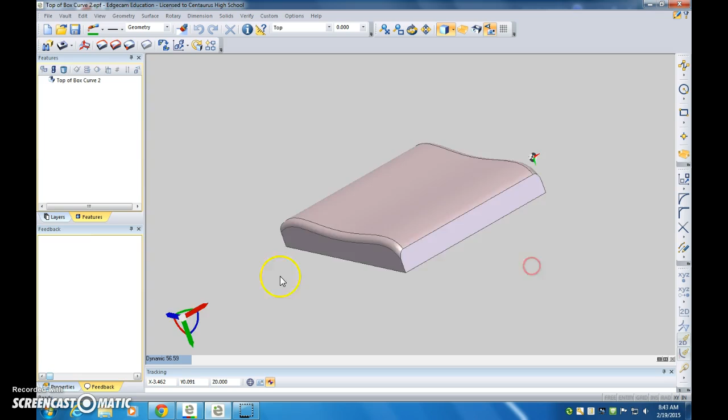Let's say this was your design. You got a neat little spline here, and then you decided, hey, I'm going to fillet these edges because it looks cool. That's not going to work because this bottom distance from this corner to the bottom of where that fillet is has to be a minimum of 0.45 inches, and I can guarantee right now it's not because I know the overall height of this is 0.75. So 0.45 should be more than halfway, and that is not more than halfway up that face.

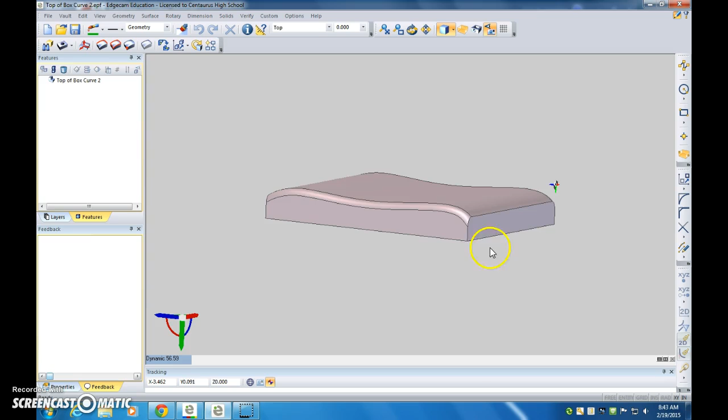So make sure you go back in Inventor and measure that. If that's shorter than that, it's not like, oh well, it's like you're going to mill into the clamp and sparks are going to fly, you'll break the bit. People will be screaming and crying.

So don't do that. This one is not going to work. We're going to have to use my other top of curve for this demo. So we're not going to save that one. And so here it is.

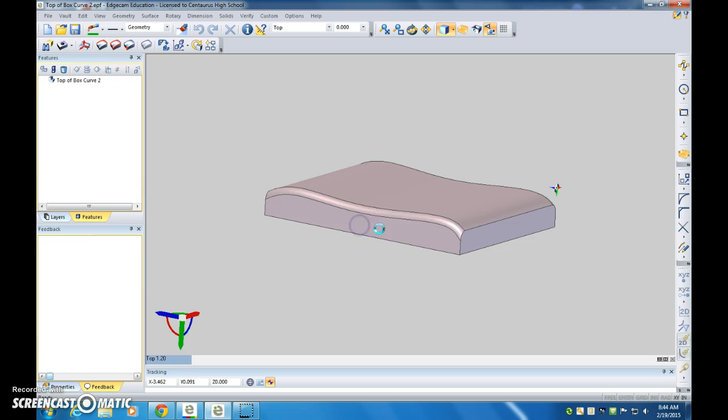So I'm going to orient this so that the long ways is this way because I need my CPL in this bottom left corner. Click my stock fixture button. Auto stock should be selected, it usually is, and then go to geometry, create CPL, origin through 3 points.

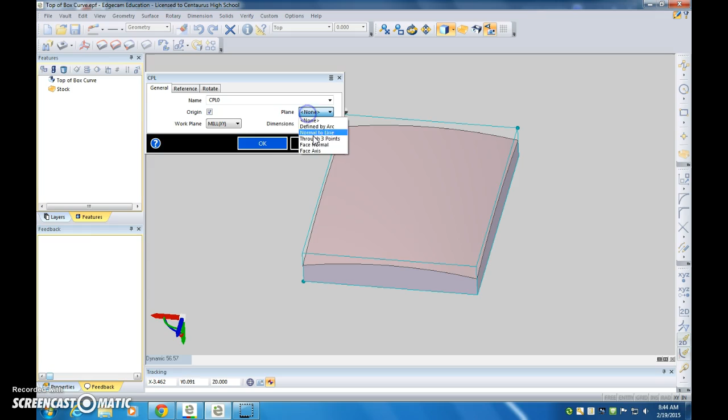Then we make sure that little blue box shows up for that corner, then the bottom right, then the top left. I'm using the scroll wheel to zoom in so I can find it because that CPL is in the way, and then I'm scrolling out and then I click that. Now my CPL looks great. I'm going along the y-axis, x-axis, and then z-axis straight up.

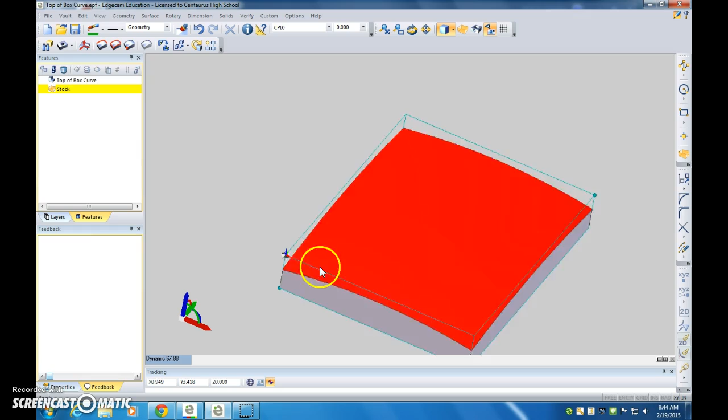So feature finder, I can click this. It's not going to find anything. It's just going to find the top surface, which is fine. That's what we want. Now we go to manufacture mode.

So you should just have one feature. You might have a couple depending on your design. And then click OK as long as it's set ProLight 1000.

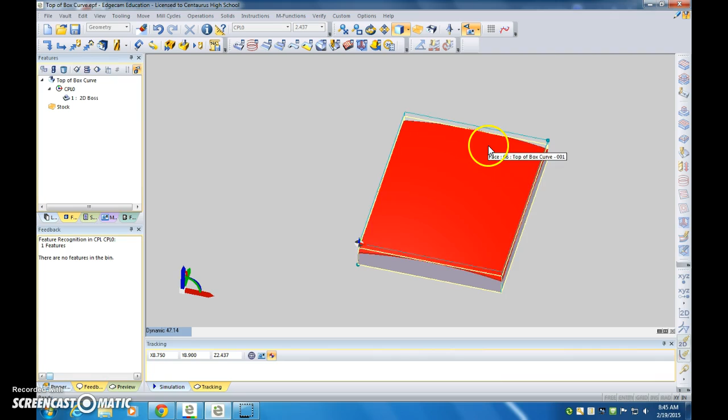Now this one is a really kind of cool here. We click parallel lace. And then I'm just going to click the top of the surface. Now if you got a really weird geometry, it might not be that simple, but just give it a try. Click it once, hit enter twice, and now we go into here.

So tooling, we want this to make sure that you say optimize. Really important it goes back and forth or you're going to be in the milling room forever. I'm going to set this to 50%. That means that it's going to go 50% of the bit over. I have a 1/4 inch bit, so it's going to go half the width of the bit over for the next pass. That might make sense here in a little bit.

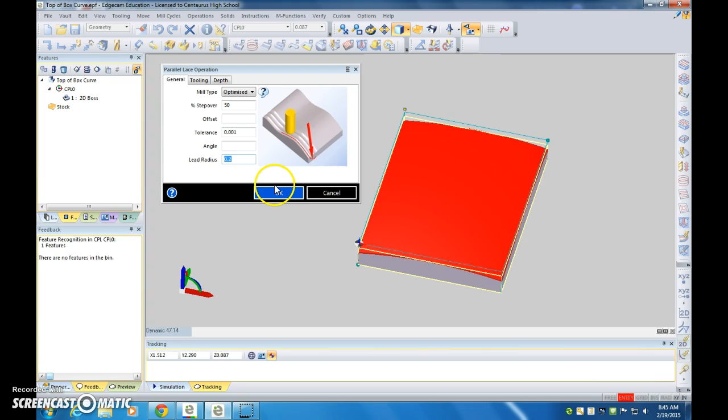I'm going to set my lead radius to 0. I don't believe that I need one. It's going to make it go a little faster.

So tooling, I want to be at 40, 20, 5,000 is our maximum. Diameter 0.25, and I'm going to do a corner radius. It's 0.125 because we're going to use a ball mill for this one. And depth is all preset on parallel lace.

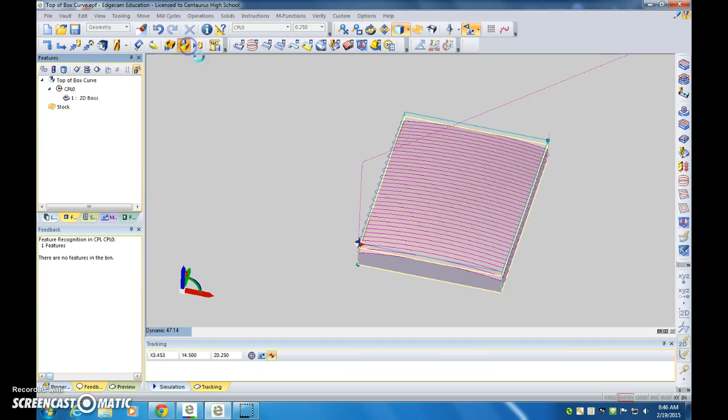So I click OK, and then it shows you the path. It just goes back and forth and up and down and makes that. So when we preview this, that's what it's going to do. And you can see these little grooves, this little like kind of wave pattern.

If I did a smaller percentage for step over, there would be less waves. So I'm going to actually show you that. We don't need to see that finished.

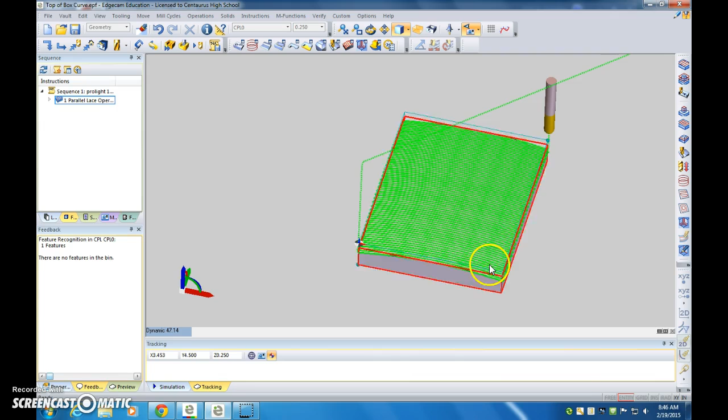I can go into sequence, this little S tab, and double click parallel lace, click OK. Now I can edit this. If I do a percent step over of 25% and click OK, you can see the lines are twice as close together. Then you simulate this, and you can see there's less of a wave pattern, so it's going to be cleaner, but you're going to be in there twice as long watching this thing mill.

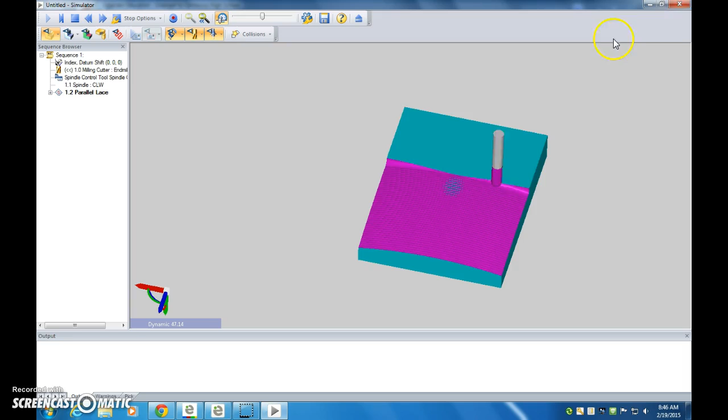So that's the drawback on getting a super clean print. There's another way that you can get a really cool clean print, so let me close that off. I can do a second parallel lace - I'll click this, click the top, hit enter twice, and this time I'm going to set the angle to 45 degrees. Everything else is the same, but I'm going to do a 40% step over. So you can see I kind of have this cross hatch.

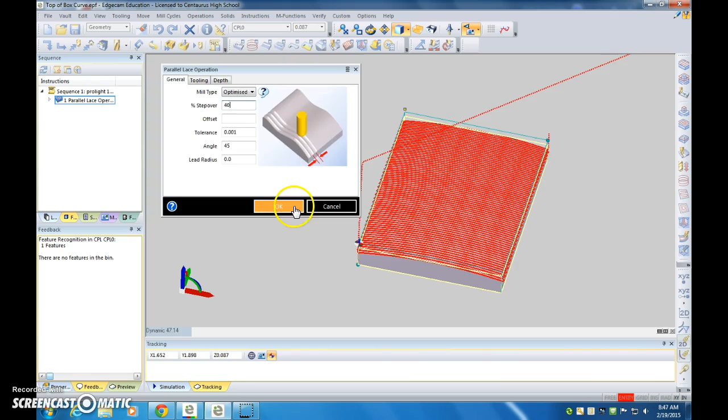I'm going to go back to the first one, and make it -45 with a 40% step over. So now they're at 90 degrees to each other, and I have this little crosshatch intersection. It doesn't have to be 50% or 25% step over - I did 40%. This shows you what it's going to look like.

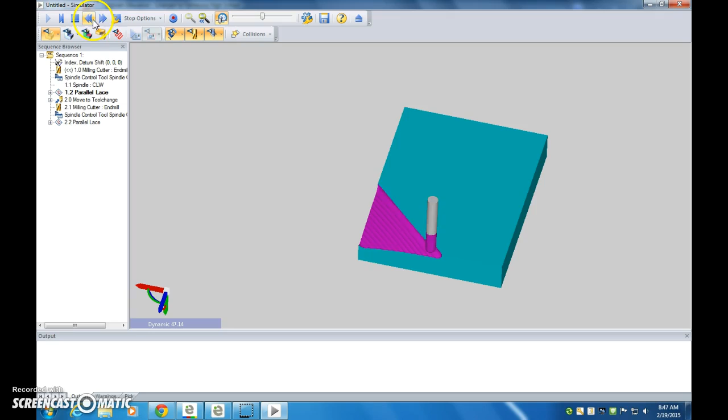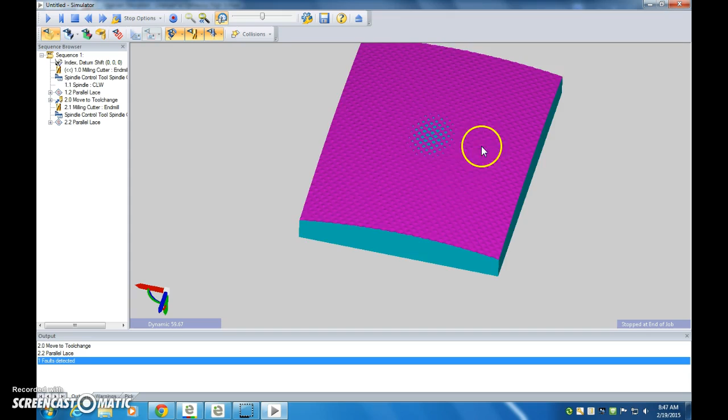We're going to fast forward this all the way through. Now it's kind of this cool little crosshatch pattern. You can do whatever you want, whatever looks cool to you. In the end, if I wanted this to be totally smooth, this would probably work - I'd just take some sandpaper and lightly sand the top of it, and it's going to take off these bumps in a hurry and make it really nice and smooth. So this would be perfectly fine.

Let me click the X. Again, if you want to edit them, make sure you're in the Sequence tab, not the Features tab. Just double click them and then click OK. Then you can edit the features that you've tried and just try different things. So that should be it for this.

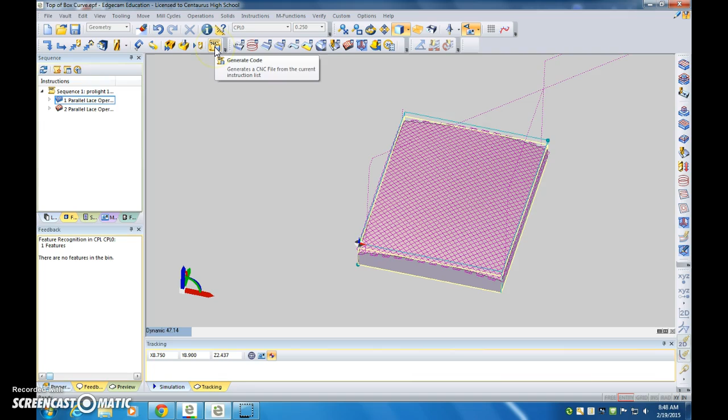To export the code, I just click Generate Code, click OK - it already exists, so yes, I'm going to overwrite this, put my name, BT, and we don't want a tool change again, so let's get rid of the first one because we can see that one.

But we need to find more, because my guess is if you did 2 parallel lace options, you're going to have another tool change. So let's get rid of these 3 lines like we did in the bottom of the box tutorial, from M05 to M03, delete those. I'm going to find next, and it says it can't find any more.

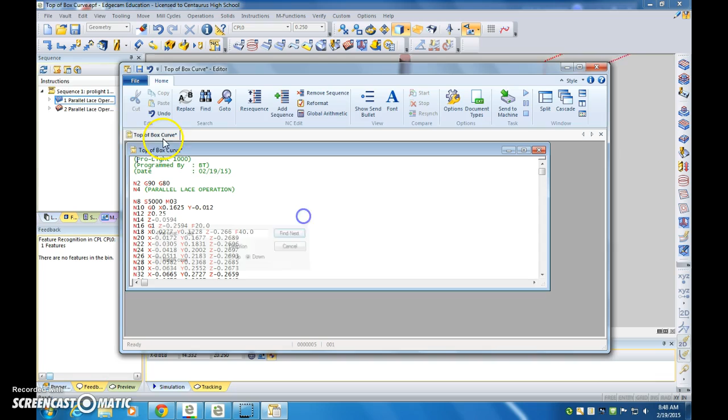So let's just double check this - there should only be 2 because I have only 2 operations. I really don't need to check, but I just wanted to show you there's not going to be any more. If you do 3 parallel lace operations, you're going to be in the milling room for a year and a half, but it'll be really clean and cool looking. Make sure you delete 3 of those tool changes. So that should be all we need.

We need to click and save this, and then I'll show you how to mill this with the CNC. That's it.